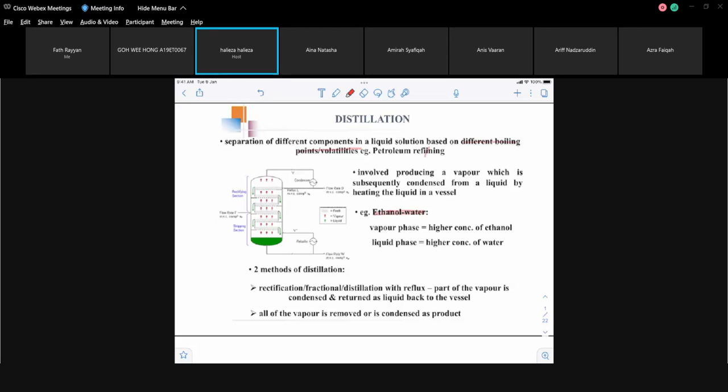Most common type of distillation that we come across is petroleum refining. I think there's a spelling error here - petroleum refining. So when you heat up, in this diagram that I have over here is a distillation column, the schematic diagram. That is a rectification or fractional distillation column. Your feed is coming in here, could be liquid, could be gas. If it's gas, it should be coming from the bottom. It could be a mixture of liquid and vapor.

So what happens is that when the liquid flows down, it gets heated up in the reboiler. So the liquid will change to vapor and rises up. And as it flows upwards - now we are not looking at startup, we are already, this is already a continuous process. This is already running. So this is the vapor coming from the reboiler, there's also another liquid coming down from the reflux.

Initially, the vapor that is rising up at the top of the column will be condensed in the condenser and changed to liquid. This is a total condenser. So you got your product as the distillate. And part of that condensed vapor will be returned back to the column, and this will be your liquid. So the liquid over here will be in contact with the gas coming up through it, so there is equilibrium on that tray. The liquid that is on the tray will be in contact with the vapor passing through the tray, so there will be mass transfer there.

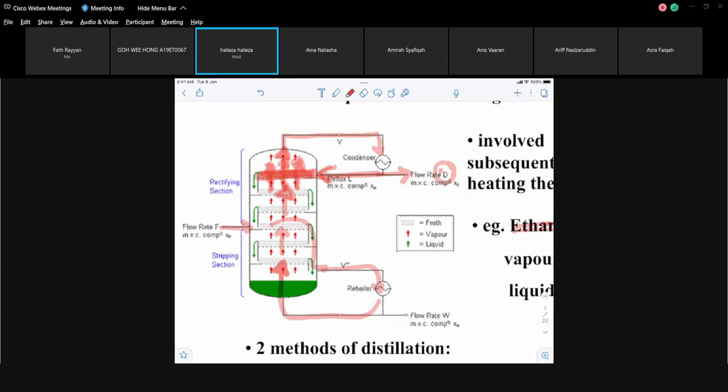As you go up through each stage, the process repeats itself until when you reach the very top, that vapor will be richer - it will contain more of the lower boiling point component. It will be richer in the most volatile component, meaning the lower boiling point component.

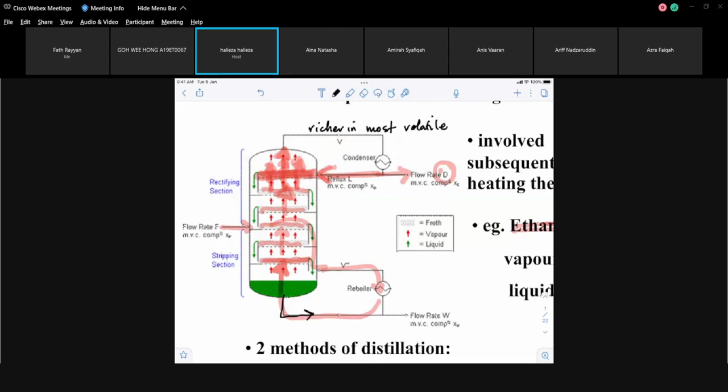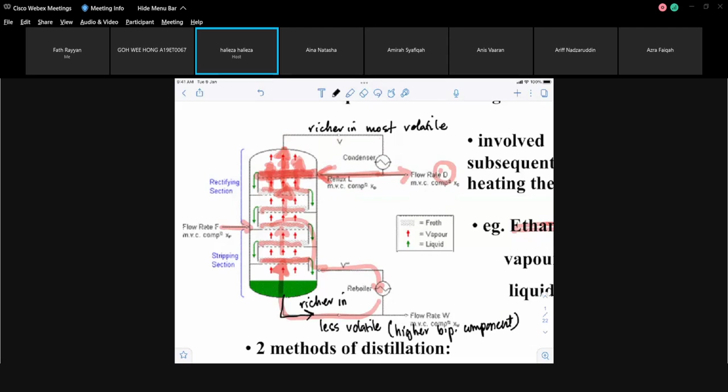And the liquid coming down will be richer in the less volatile, meaning the higher boiling point component. So this will have a higher boiling point component, and at the top product you will have the lower boiling point component. That's how the separation is done.

This is only looking at two components. For example, you have ethanol and water. There will be more ethanol here compared to water, and more water in the bottom product compared to ethanol, because ethanol vaporizes easier compared to water - it's more volatile compared to water. So there will be more ethanol in your distillate.

This is referred to as distillate, and this is referred to as the bottom product. Subscript W here, subscript D here. That's how the separation is done.

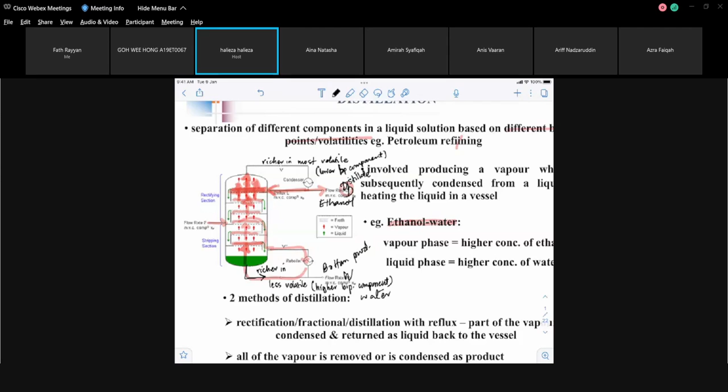In this topic, the first part will be calculating the number of stages, as you have done in absorption. The operation itself can be done using a packed tower, but in this distillation we will concentrate more on stages - how to calculate the number of stages, how to calculate the number of trays. We are not going to look at packed tower, but it can be done - distillation can be done in a packed column.

So there's two types of distillation - well, not really, there's a lot more. There's more than two types of distillation. Sorry, there's two methods of distillation. The schematic diagram that we just looked at involves reflux.

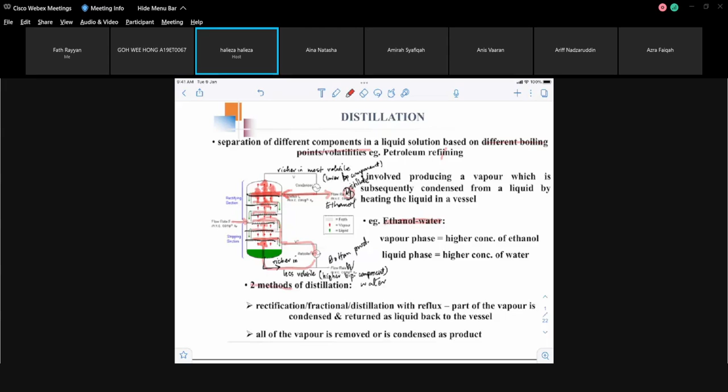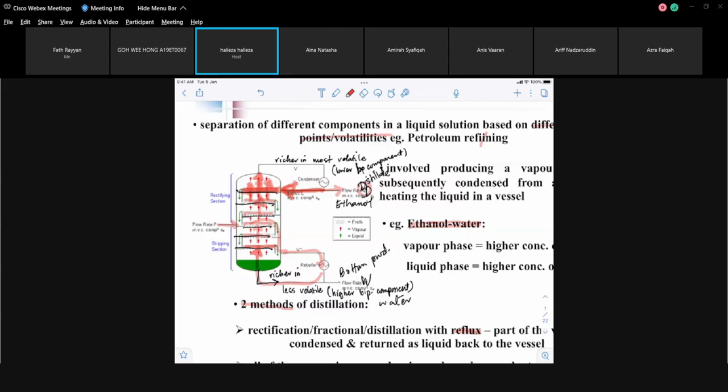Reflux means you will return part of the condensed liquid into the column. That will enrich your product - your product will get richer or purer at the top, and you will get a much purer bottom product. That's the advantage of having reflux.

And there's another type whereby instead of returning the condensed liquid, you remove the vapor or the condensed liquid totally as product - you will not return it back into the column. So that's the two types of distillation.

But the types of distillation, there's quite a lot of them. Simple distillation, flash distillation, steam distillation - these normally involve only a single stage. These three types are mainly single stage. The others can be multiple stages. You have vacuum distillation - obviously that means it operates under vacuum.

Extractive distillation has another solvent, another liquid coming in besides the feed itself. So majority when it forms an azeotrope, then you will have an extractive distillation - you can read further on that. There's another, molecular distillation, but we're not going to look at that, or extractive or azeotropic. We'll be looking mainly at simple, fractional, steam, flash, and equilibrium.

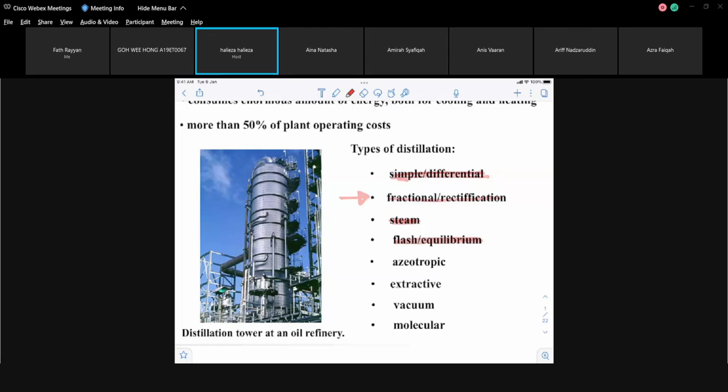Before you can do distillation, like when you were doing absorption, you need the vapor-liquid equilibrium relationship. When looking at absorption, the vapor-liquid equilibrium relationship was Henry's law. Now we'll be looking at Raoult's law, which normally applies to an ideal solution, meaning the substances are very similar to each other. For example, benzene and toluene are both hexagonal ring-type structures, with the only difference being one attachment. So they are similar, so they are ideal.

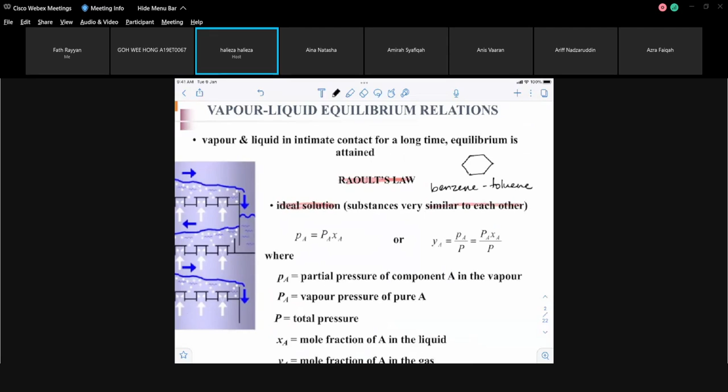In Raoult's law, the equation involves partial pressure and vapor pressure. You're mainly interested in getting the relationship between Y and X. Y is the mole fraction in the gas phase or vapor, and X is the mole fraction in the liquid. Component A is the one that is transferring. For example, you have A and B, so component A transfers both ways, from liquid to gas and gas to liquid - condensing and vaporization, both ways.

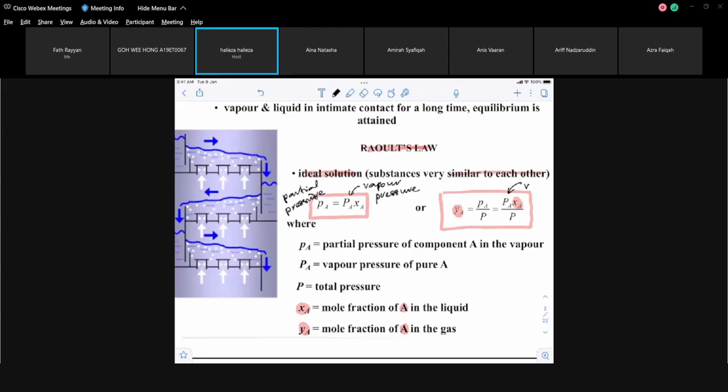The equation is: the partial pressure of component A equals the vapor pressure of component A times the mole fraction of component A in the liquid phase. There's another way of looking at it in terms of Y, which is your mole fraction in the gas, and X is your mole fraction in the liquid. So here you have your vapor pressure divided by the total pressure. From this equation, you'll be able to come up with the vapor-liquid data needed to plot your graph.

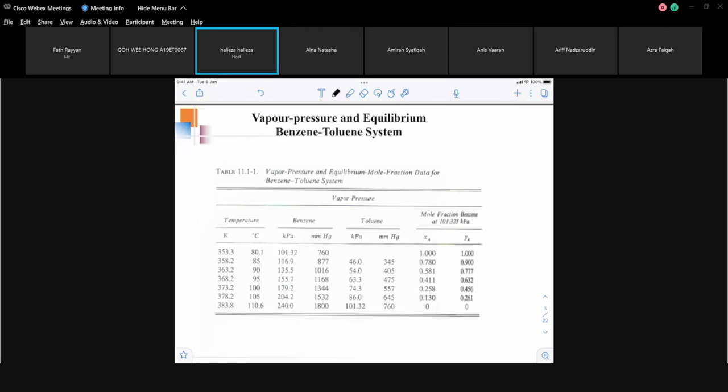Normally, the data is already given, so you don't need to use Raoult's law to get the data. For example, in this case for benzene and toluene, you have the vapor pressure here, the temperature, and the mole fraction for X and Y at one atmosphere - meaning at a constant pressure. So you have temperature versus X and Y, and the vapor pressure is also given. This is your temperature, this is your X or your Y.

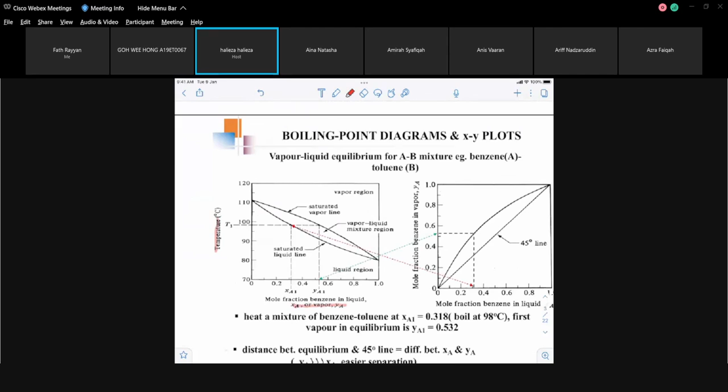From this graph, you'll see there are two curves. The bottom curve is your saturated liquid line - at the very bottom is completely liquid, a single phase. The top curve is the saturated vapor line, so anything above that will be complete vapor phase, a single phase of vapor. But anything enveloped within the saturated vapor and liquid line is a mixture - you will have liquid and vapor, it's a mixture.

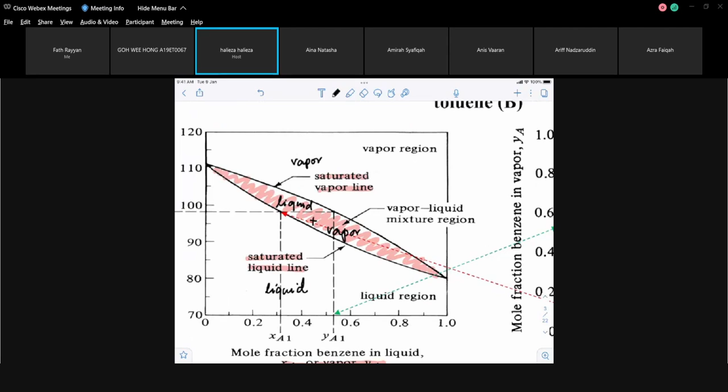So this is your temperature versus X-Y plot. For example, if you're looking at a temperature of about 98, the liquid composition is that, and the gas composition is that, of your component A. And the two of them will be in equilibrium.

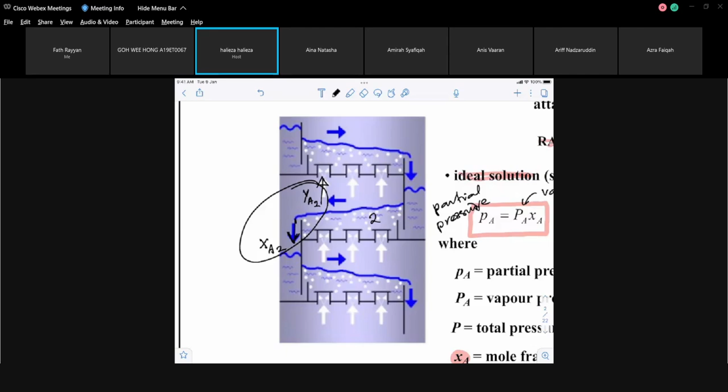So if you look at a tray, this is your vapor coming out - for example, this is tray number 2. That vapor will have a composition of YA2. And the liquid that is leaving that tray will have a composition of XA subscript 2. So the two of them will be in equilibrium. That's what you get from this graph.

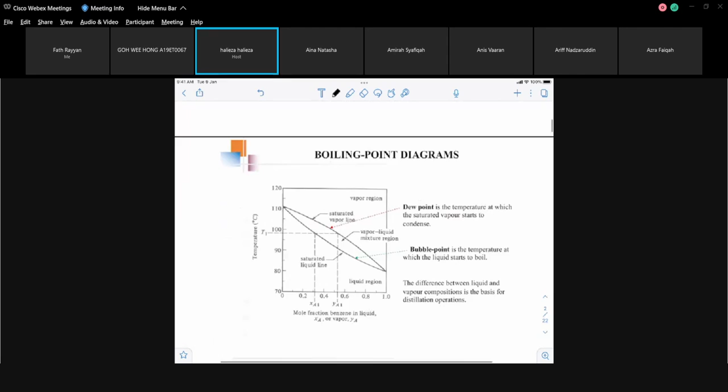At that temperature on that tray, the same thing will repeat itself. Again, over here you have the vapor there, and the liquid coming down there, so it will be in equilibrium. The saturated vapor line is also referred to as the dew point, and the saturated liquid line is also referred to as the bubble point.

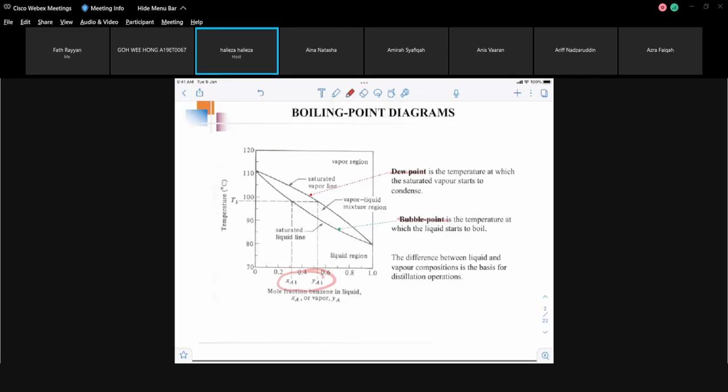So the difference between the liquid and vapor composition is what we want when doing distillation. Because the liquid is coming down, that will be your bottom product, and the vapor is going up, that will be your condensed vapor, your top product. So the difference in composition is what makes the separation in distillation.

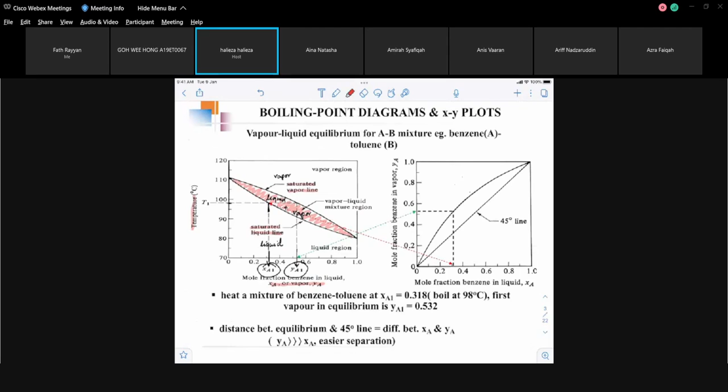Mainly, you will not be looking at the temperature versus XY diagram. Sometimes you're given the pressure XY diagram, where temperature is constant. Sometimes you're given the enthalpy XY diagram. But most of the time you will be looking at this diagram, which is XA versus YA.

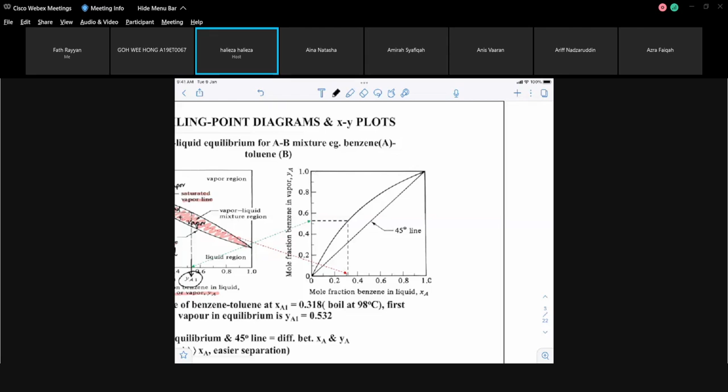If you look at this diagram, you will draw your mole fraction. The highest value is 1, the lowest value is 0. You will draw your 45-degree line, which is that diagonal line, as a reference. The equilibrium value is the curve, this curve, that is the equilibrium value.

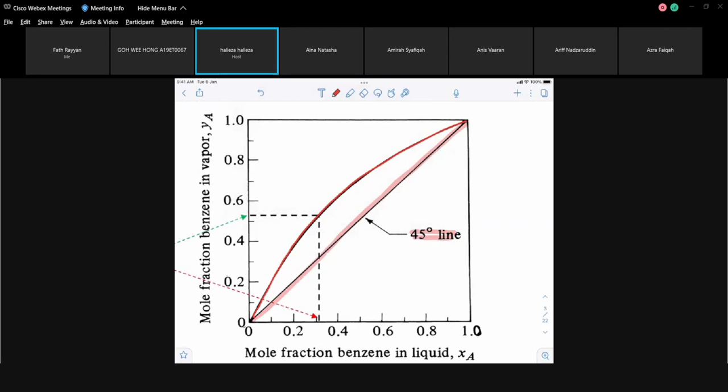So if you want to find the composition for X, you go towards the X-axis. If you want to find the composition for Y, or the composition in the gas phase, you go towards the Y-axis. If you want the composition of component A in the liquid phase, you go to the X-axis. In this case, you are looking at benzene, and the diagram is for a benzene-toluene vapor liquid equilibrium.

So the farther away the distance of your equilibrium curve is — this is your equilibrium curve, or equilibrium line, whichever you want to call it — the difference of the equilibrium curve from the 45-degree line, the easier it is to separate.

But if it is at this 45-degree line, y equals to x, that value is the same. For example, if you look at this, it's the same. My diagram is not that good, but let's redo it and draw a proper line.

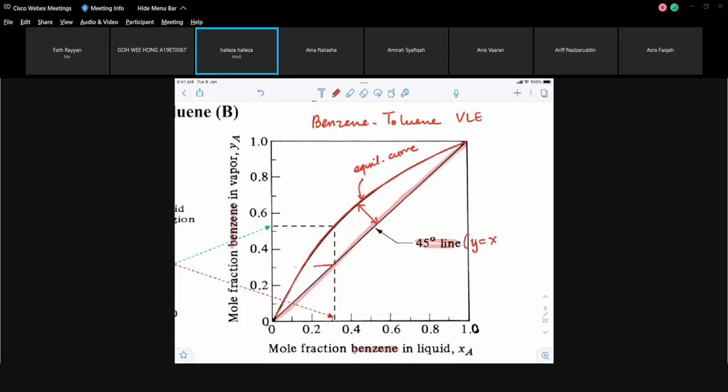But make sure that it is straight. It's not straight. Straight line.

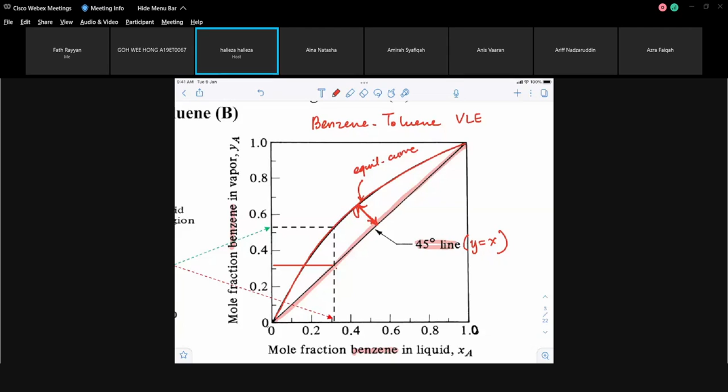You can see that the value on the 45-degree line is y equals to x, they're the same value. So when y equals to x, no separation will happen. But when there is a big difference, a big gap, between the equilibrium curve and the 45-degree line, separation will occur very easily. But the narrower it gets as it approaches the 45-degree line, the harder it will be to separate. So when it is on y equals to x, or on the 45-degree line, no separation will occur.

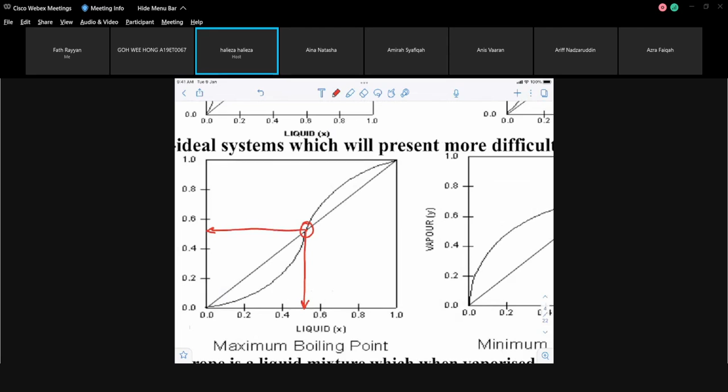For example, I have this diagram here, over there, and over here. At that point, your composition of your liquid and your vapor will be the same, so no separation will occur. That's why you cannot go any further — you cannot proceed to get a much richer composition.

For example, let me roughly give this value about 0.5. That's your x, and this one is about 0.5 also. So that is the maximum you can reach — the composition of your vapor and liquid are the same. You cannot get any richer than that. Your vapor that condenses at the top product will not get any purer than 50% of the composition, 0.5 mole fraction.

You cannot reach 0.8 composition for the vapor or the gas phase. I mean, for the liquid and also for the gas phase, you cannot get it any richer. So that means for your bottom product and top product — the majority is in the top product because you wanted it there, since the mole fraction is majority for component A, which has the lower boiling point.

There are two components, A and B. One has lower boiling point, one has higher boiling point. So you wanted more of component A in your top product, but you can't reach that because at that point y equals to x — you cannot go beyond that point anymore. The highest you can reach for your top product composition is only 0.5.

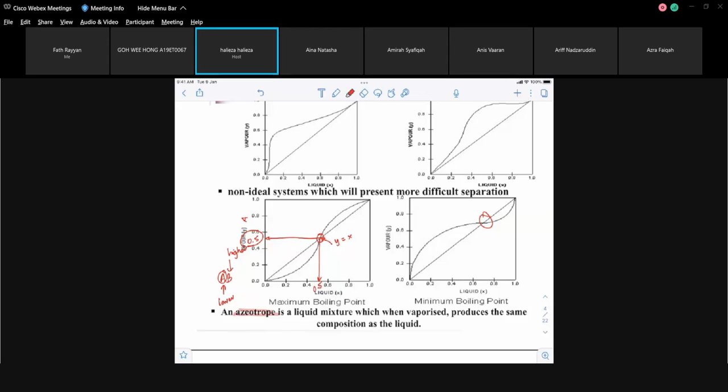That is referred to as azeotrope. Some examples of an azeotrope include ethanol-water. You cannot get purer than this using distillation — you cannot achieve beyond where it forms at y equals to x. At that point, you cannot reach any higher; the composition cannot be any higher.

So that means if you want a purer product, a higher composition for your mixture — for example ethanol — then you have to use a different method of distillation, and that is normally done using extractive distillation, not the typical fractional distillation. When you have an azeotrope, this is sometimes referred to as azeotropic distillation.

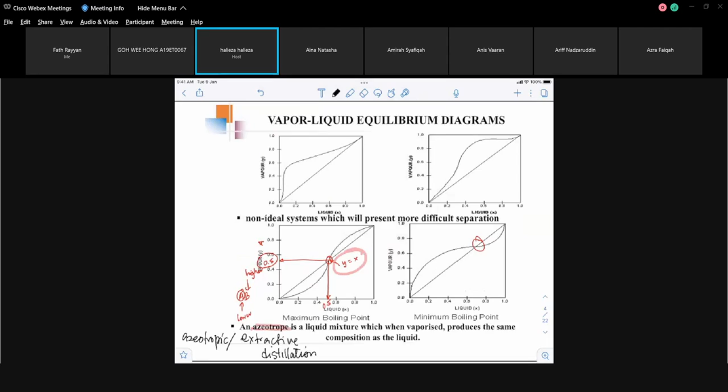So that's what you need to know when you have an azeotrope. You cannot reach it any higher. You stop when it reaches the 45-degree line.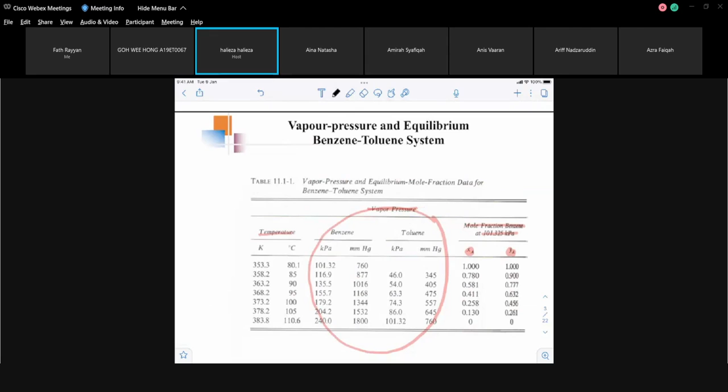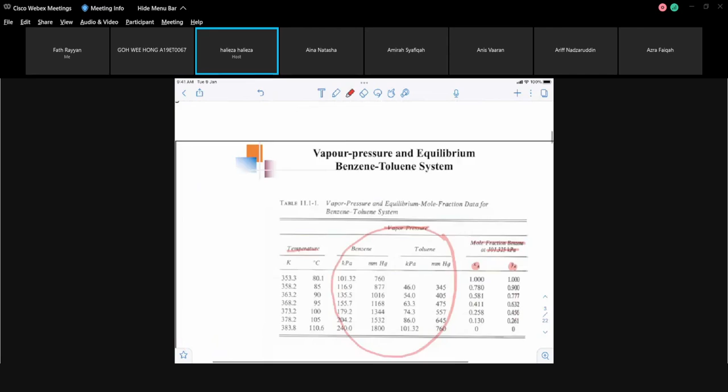So you get your data using either Raoult's law, in this case Raoult's law, or there's another way to get your data, which is using the relative volatility. So far, any questions? No? Okay, let's see whether we have any question on Raoult's law.

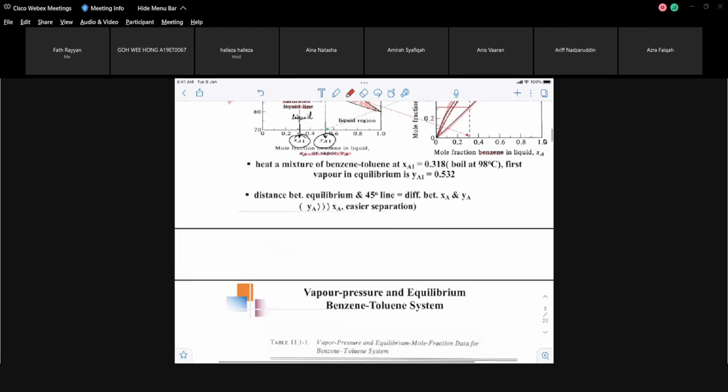Okay, this one. This is Raoult's law. You need to find the composition of your vapor and your liquid at a temperature of 95. They should be in equilibrium.

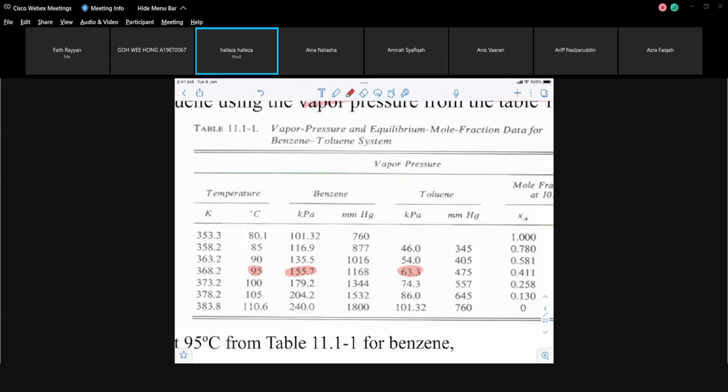Given the vapor pressure, they are from this table, so that's the table. That's the vapor pressure. At 95, the temperature is 95, so if you look at 95, that's 95. And the vapor pressure for benzene in terms of kilopascal is that. The vapor pressure of toluene in terms of kilopascal is 63.3.

So you wanted to find that value for XA and that value for YA. But the table is already provided with the values for XA and YA. But how do they manage to get it? They are using Raoult's law, and Raoult's law is YA equals vapor pressure divided by total pressure times XA.

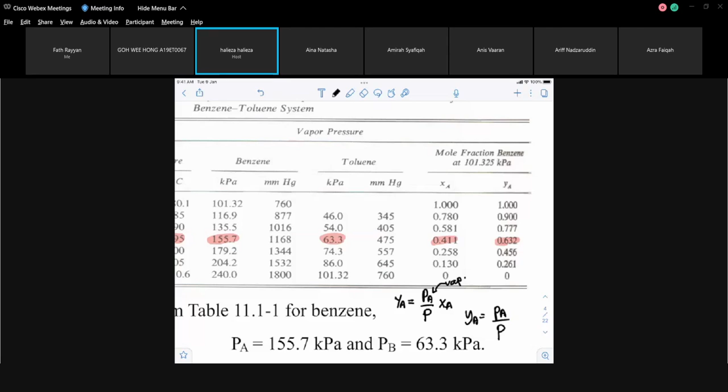Sorry, that is okay, that is vapor pressure. That is vapor pressure. But in order to get your YA, you can also get it using the partial pressure, that is partial pressure over total pressure. That is also Raoult's law. So let's go back to our Raoult's law.

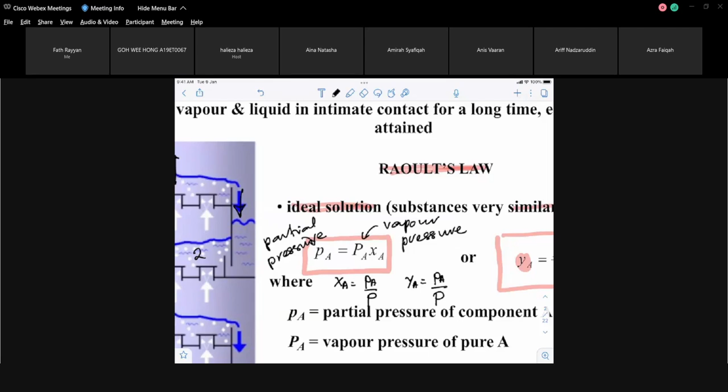That is, XA equals to partial pressure over total pressure, or you can also have YA equals to partial pressure over total pressure. It depends on if you're looking at the vapor phase, it should be in the vapor phase, isn't it? It cannot be in the liquid phase. That's a bit, let's see, I don't think that's correct there. That's correct there.

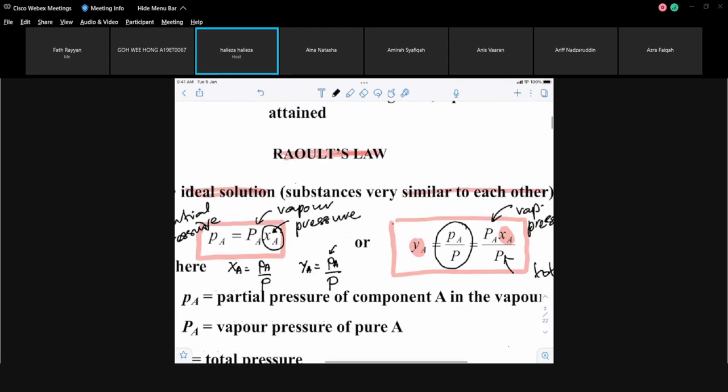Let me check on that. But this is correct, there you go, there you go. Okay, now that is correct. This side is correct, this side is correct. This side, I don't think it should be XA. I think it should be YA. Okay, so go back to the example.

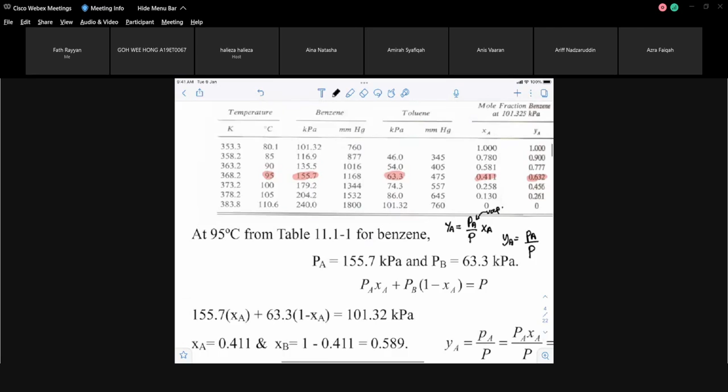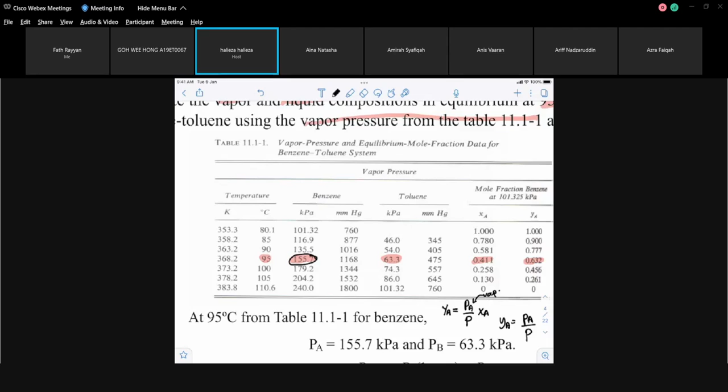So your vapor pressure, that is your, okay how to go about here, you notice that this is your vapor pressure, vapor pressure is capital P, sorry, subscript A, 155.7 kilopascal. So that's for benzene. So if you want to find YA, that is partial pressure, vapor pressure, sorry, I'm getting confused because I need to get the equation first.

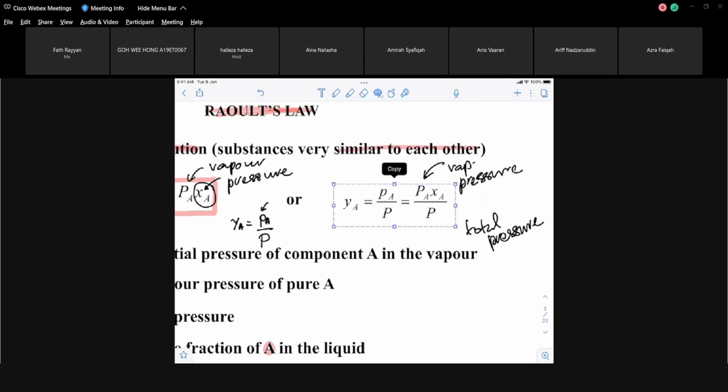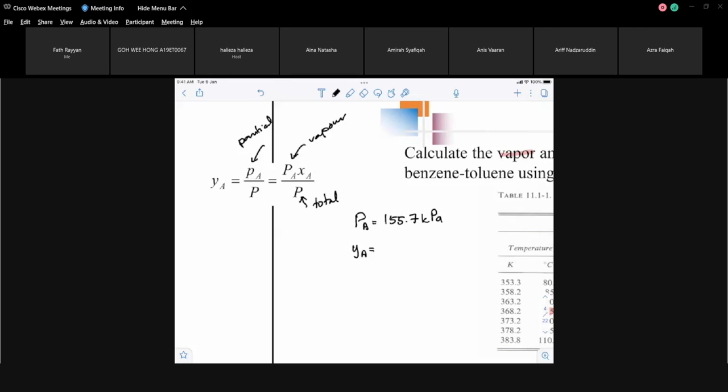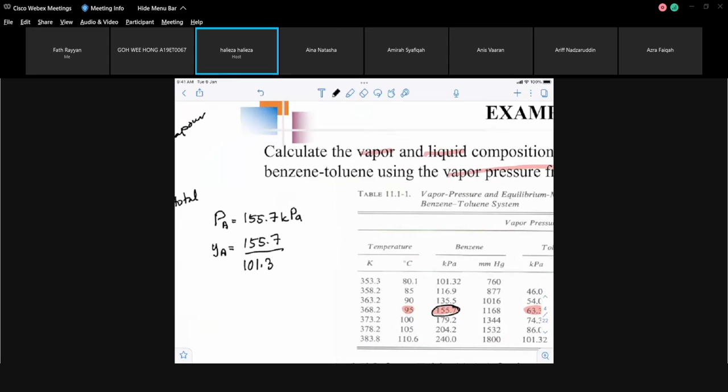So over here, that is partial, that is vapor pressure, that is total. So YA is equals to your vapor pressure, 155.7, divided by your total pressure. In this case, the total pressure is 101.32 kilopascal, both of them. So that's XA. That's one relationship that you have, but one equation, two unknowns, that's not possible.

But you do know that partial pressure A plus partial pressure B is equals to total pressure. But this thing is vapor pressure, you are given vapor pressure, not partial pressure. And where is the relationship of partial pressure? That is partial pressure, and partial pressure is equals to YA times total pressure.

So now what's next? Anybody? Any suggestion? Any suggestion? How to proceed? Anybody? We could rewrite XA in terms of pressure. XA, what is XA then? Yes.

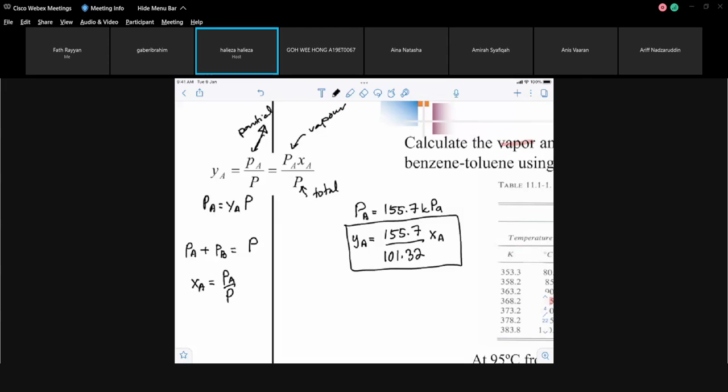What is XA then? It will be the partial total pressure over partial pressure. But it's the same, it's not, partial pressure over total pressure. Yes, probably partial, we'll give the same answer. That is now possible. What next? Anybody, what's next? Okay, this is one equation.

So your partial pressure is equals to YA by total pressure, right? Is that correct? Is that correct, guys? Yes, doctor. Yes, doctor. If I substitute it over here, is that partial? That is partial pressure. Is okay. Now we should be getting this equation, that equation.

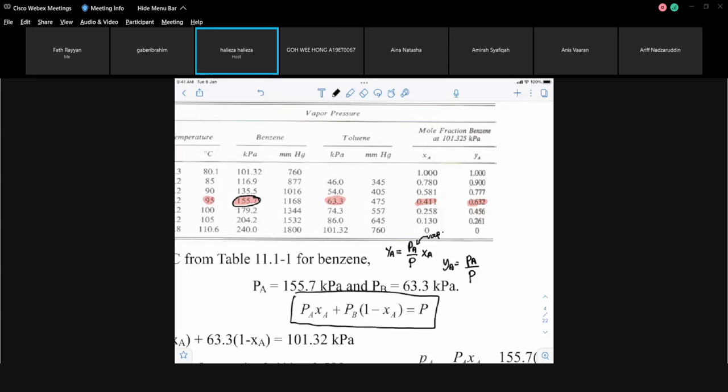Do you know how we get that? From the partial pressure, from the partial pressure we're going to get that equation. Do you know how to get that? Anybody, suggestion? Partial pressure of A plus partial pressure of B equals to total pressure.

Your vapor pressure of A times XA plus your vapor pressure of B times XB equals total pressure.

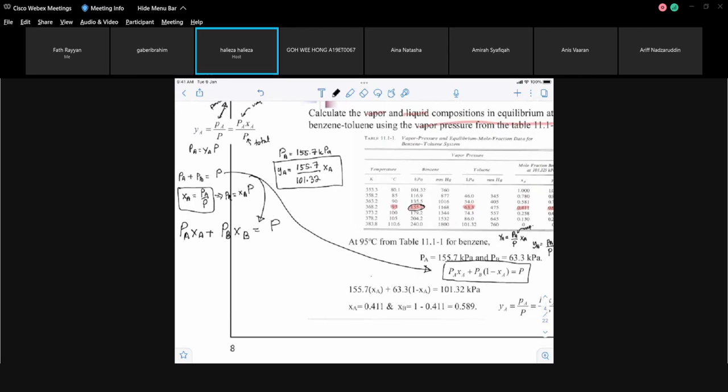Because of partial pressure, let's go back to the equation and the relationship. Let me get this correct, I'm confusing you guys. Partial pressure equals vapor pressure. This is partial pressure, that is total pressure, that is vapor pressure. That's where I got confused just now.

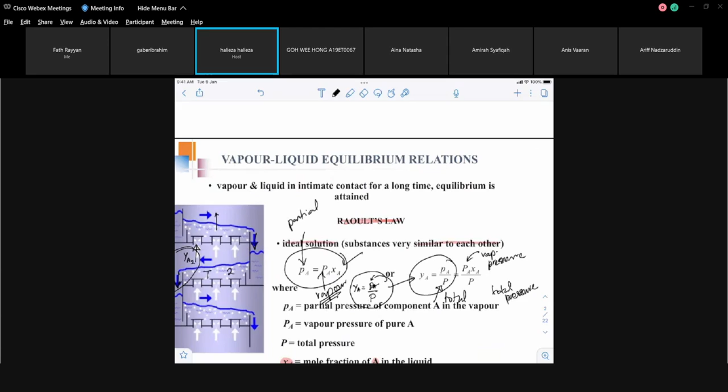This is partial pressure, that is vapor pressure. So when you do the partial pressure, this is partial pressure A plus partial pressure B equals total. So when you have partial pressure, you substitute vapor pressure times XA, vapor pressure of B. That's vapor pressure, capital. This is lowercase, that's partial. I got confused now, and this is vapor pressure.

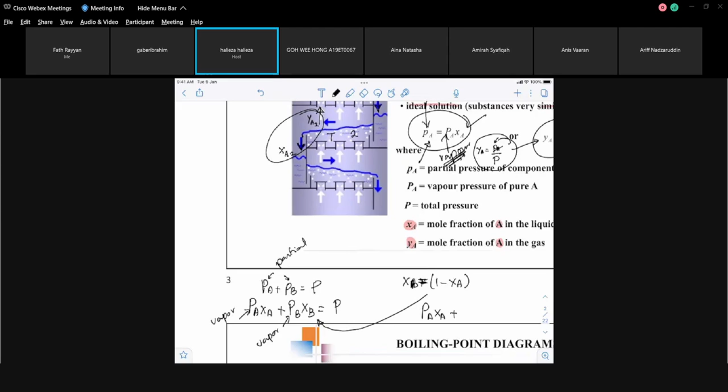Times XB equals total pressure. So now you only have two components, A and B. So XA plus XB equals 1, meaning XB equals 1 minus XA since you only have two components. Substitute that in, and you get vapor pressure of A times mole fraction of A plus vapor pressure of B times 1 minus XA equals total pressure.

Is that correct, guys? Still confused? Nobody going to answer? Okay, so that's what we got now. This equation is how we derive the equation listed here. That's the equation, that's the equation there. So once we manage to get that equation, I'm going to put it here.

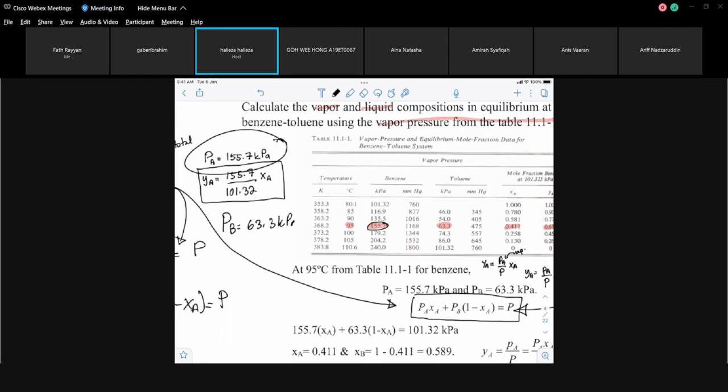Once we have that equation, all you have to do is substitute your vapor pressure of A there, and your vapor pressure of B, which is 63.3 kilopascal, substitute it there. So you have the total pressure 101.32. Everything is there. Your equation will be 155.7 XA plus 63.3 times 1 minus XA equals 101.32. So the only unknown is XA.

Once you manage to get XA, then you will solve for YA using this equation. Is that correct? Let's go back again.

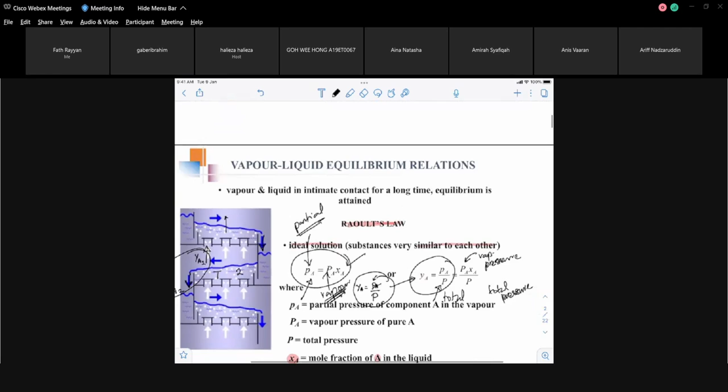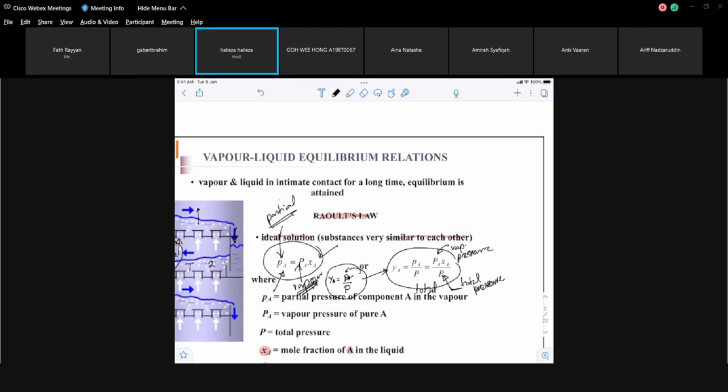I think I made a mistake there. Sorry guys, YA, this is the equation I made a mistake on just now. This is the equation, this is partial pressure, this is total. I already got it right there, but I wrote it wrongly here in the example. That is wrong. Yeah, I got it correct, why am I confusing myself? That's the total pressure, I already got it right.

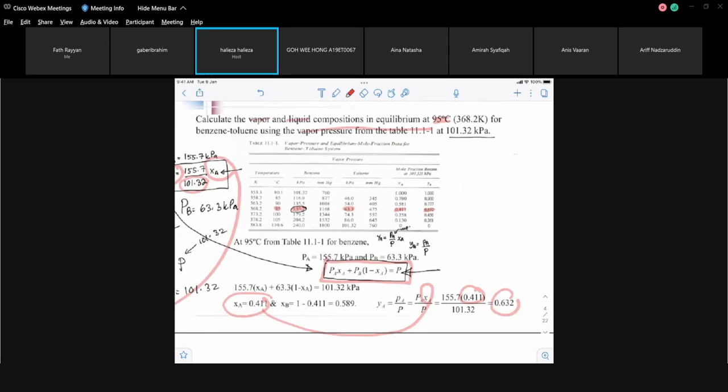So once you manage to get XA here, substitute your XA there, you should get your YA. If you look at the solution here, from this equation you get your XA. Then when you substitute it inside this equation, you get your YA. That's the value here, over here, and over there. Normally you don't have to do this because the data is already provided.

Let me recap what I've done because I think I caused some confusion there. So what you have to do is find XA and YA, using the fact that the sum of the partial pressures equals total pressure. That's one equation. And the fact that you have partial pressure, that's partial pressure.

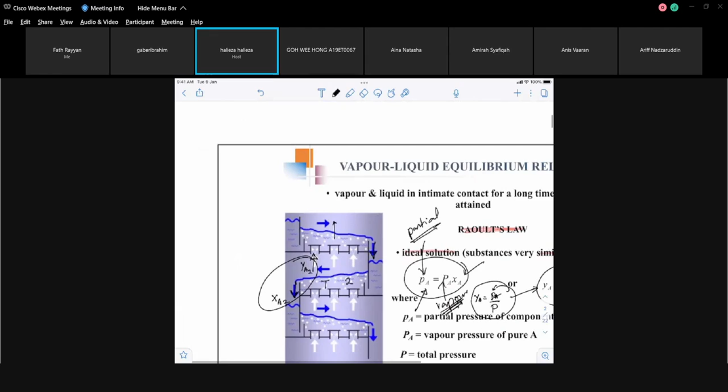Confused, no, I got confused again. XA, sorry, I forgot, I keep getting the total pressure mixed up there. XA, okay, there you go. Sorry guys, I keep getting mixed up. This is partial pressure, that's vapor pressure, I keep getting mixed up. So when you substitute it inside this equation, it will be in terms of XA. These two, substitute here, substitute there, substitute there, you get this.

Let me explain all over again, let me get it done better. You have your partial pressure, the sum of it equals total pressure. This is partial, this is partial, same as that partial. Okay, but this is also partial. But this is not partial, that is vapor pressure. That's why I got confused just now between the P, there's two, one small case p and one bigger capital P.

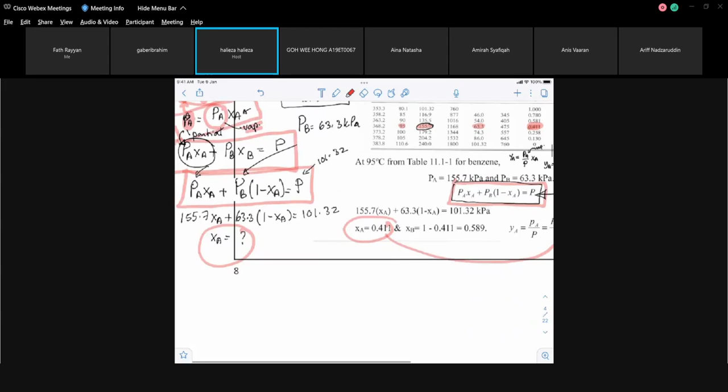Okay, so you substitute this equation into this equation, you end up with this equation or that equation. Your partial pressure, let me get it right again, is equal to vapor pressure. There's two P's, that's the problem. Okay, this is small p, and XA. Your small p, that's your partial pressure. This is partial to total pressure.

So you substitute this part over there. Your partial pressure B is equal to vapor pressure capital P, X B. When you substitute that over there, you end up with partial vapor pressure XA plus this is capital B, so get it right. Now I got confused because of the capital and the smaller letter. And the fact that XB equals 1 minus XA, so you substitute that here, you end up with this equation: vapor pressure XA plus vapor pressure B times 1 minus XA equals total pressure. Get it right, the small p and the capital P.

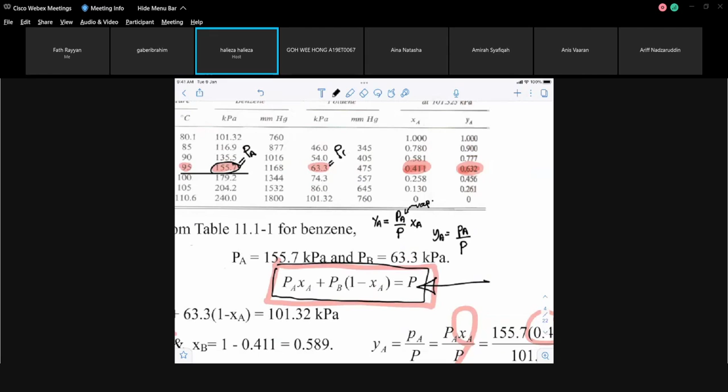I got confused there. Okay, so now you know that your values from the graph, from the table, at 95, that is your vapor capital A, capital PA, and that is your capital PB, your vapor pressure. So substituting it inside this equation: 155.7 XA plus 63.3 times 1 minus XA, and the total pressure is 1 atm. So it's only in terms of XA, you solve for XA, and the answer is, if not mistaken, 0.411. That's the mole fraction.

So once you manage to get that, now you can solve using YA equals to, there's another relationship: your vapor pressure divided by total pressure. Vapor pressure A divided by total pressure, times XA. So your vapor pressure of A is 155.7 divided by total pressure. So your XA is 0.411. You should be able to get your answer for YA, and YA is equal to 0.632.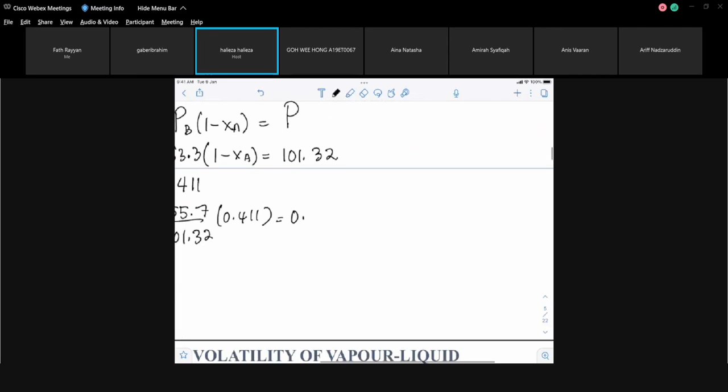Okay guys, sorry about that, a bit confusing there because of the vapor partial pressure and vapor pressure. A bit confusing because of the small p and the capital P. For me, it caused you guys to be confused. Okay, is that okay, guys? Any questions on that? Is that okay?

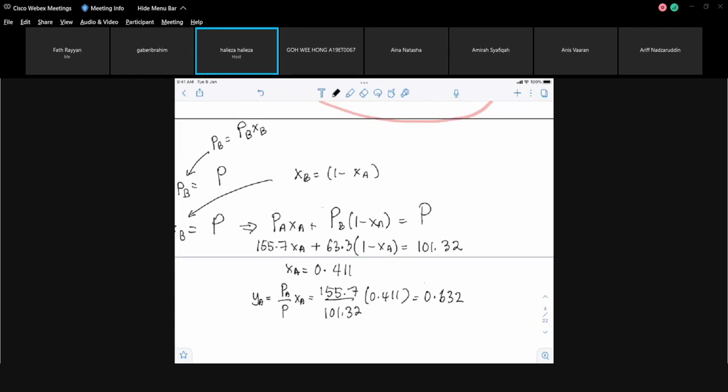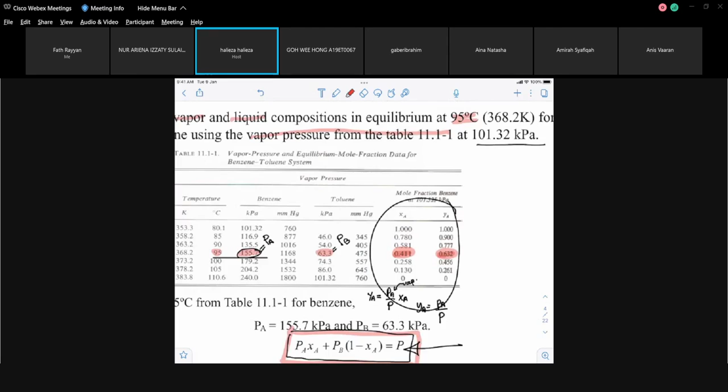Actually, you really don't need to do the calculation because the data is already there. These are the data that you need to plot your X and Y graph, which is that graph over here, your Y and your X. That's all you need, they're already in tabulated form. Majority, they are already tabulated, unless somebody introduces something, then you have to do the calculation. Then this is how you do the calculation. But that's a lot of calculation if you have a lot of temperature range, isn't it?

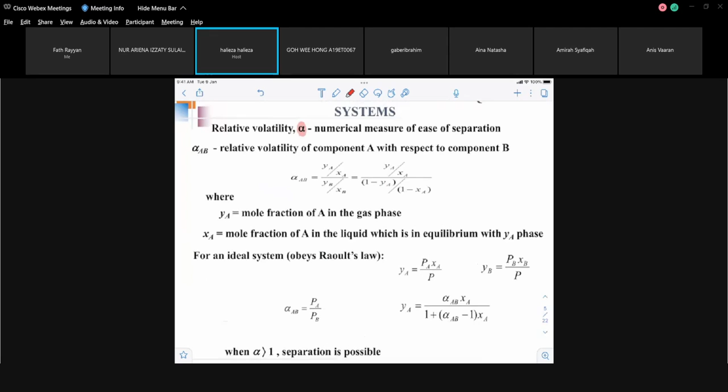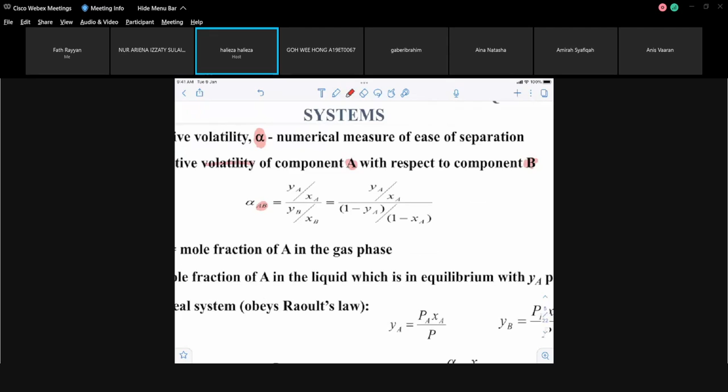That's one example. And the way to get your equilibrium data is using relative volatility, denoted by alpha. If you have two components A and B, then it will have subscript A and B. That means how you compare the volatility of component A with respect to component B. That's what it means. How easy is component A compared to component B in terms of volatility, in terms of how easy it is to vaporize. So this is the equation.

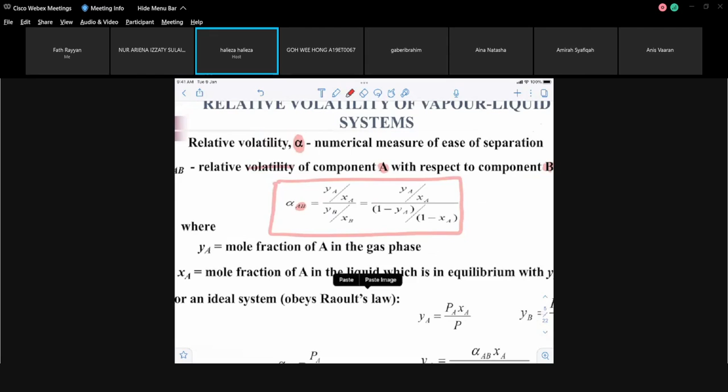And if you get relative volatility equals to 1, then no separation will occur. It should be greater than 1, then it's possible. Again, if you are using an ideal system that obeys Raoult's law, this is the final equation you will get, how to get your Y and your X in terms of the relative volatility. So this is the equation for Raoult's, using Raoult's law.

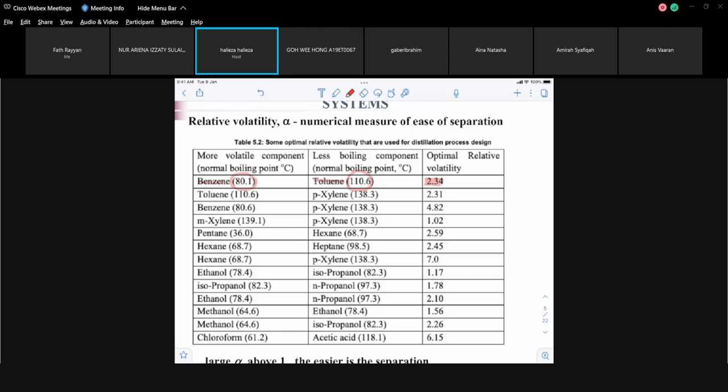And if you want to look at the values of relative volatility, for example benzene and toluene: these are the boiling points of benzene, this is the boiling point of toluene, at normal temperature, meaning 1 atm pressure. So this is the relative volatility, 2.34. That means it's above 1, it's possible to distillate it, to separate benzene from toluene. The higher the value, the easier the separation. For example, you have a value of 7.

For hexane, a boiling point of 68.7, and p-xylene, a boiling point of 138.3. You can see the big difference in boiling point. Then it becomes easier to distill, being reflected in the relative volatility, the value is 7, quite high. And for benzene, if you compare these two, benzene and toluene is 2.34, and hexane and p-xylene is 7. So that's a big difference in terms of relative volatility. It's far easier to separate hexane from p-xylene compared to separating benzene from toluene.

You can notice that the boiling point is quite a big difference too. If you look at benzene and toluene, it's 110.6 minus 80.1, that's the difference. If you look at hexane and p-xylene, the boiling point difference is 138.3 and 68.7. That's a much bigger difference.

So the lower the value is, for example close to 1, you can see that the boiling point is very close, 139 compared with 138. The closer the boiling point, the harder it is to separate using distillation.

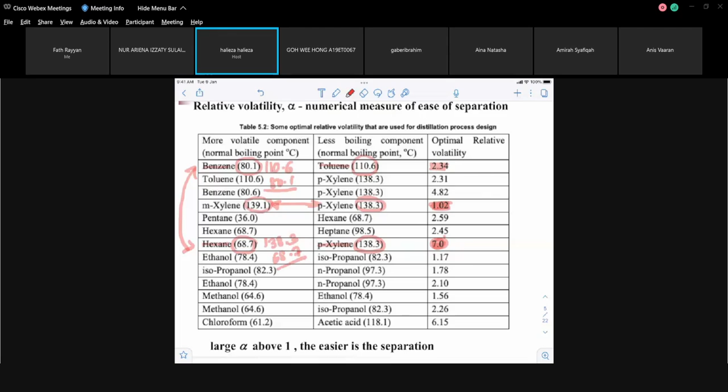The relative volatility does reflect it. You can see that it's almost 1. If it reaches 1, then you will not get any separation. In fact, this is really quite difficult to separate the two of them using distillation. It's almost impossible.

So that is relative volatility. The higher the value of your relative volatility, the easier it is to separate. That means the difference in the boiling point is very, very big, the difference of the two boiling points that you're trying to separate should be bigger. You can see this boiling point, 61 and 118, so the relative volatility is also higher.

Okay, so any question on this so far? On the relative volatility or anything earlier? Any questions?

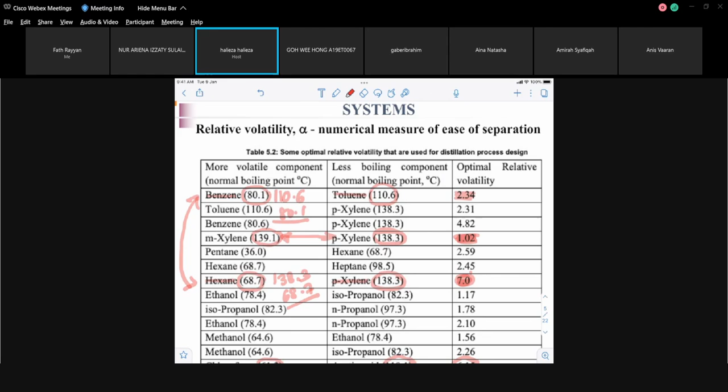Doctor, so in this distillation, we only deal with Raoult's law so far, or we may also introduce Henry's law? You'll be looking at Raoult's law and also relative volatility.

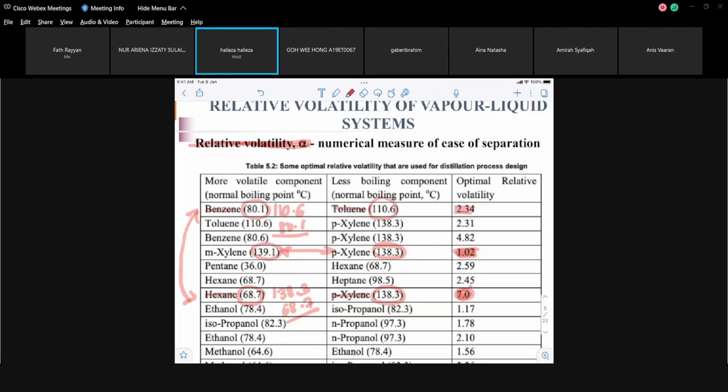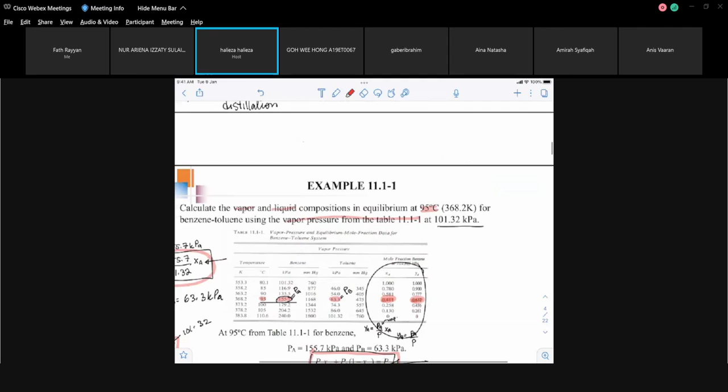You were looking at, most of the time, the relative volatility is mainly used in multi-component distillation. The Raoult's law, just like I mentioned earlier, the data is already provided. Unless you don't have the tabulated data, then you will have to use Raoult's law.

Does that answer your question? Yes, doctor. Thank you, doctor. Any other questions?

I spent too long on this example, got confused because of the partial pressure and the vapor pressure. So if there's no question, I will stop here.